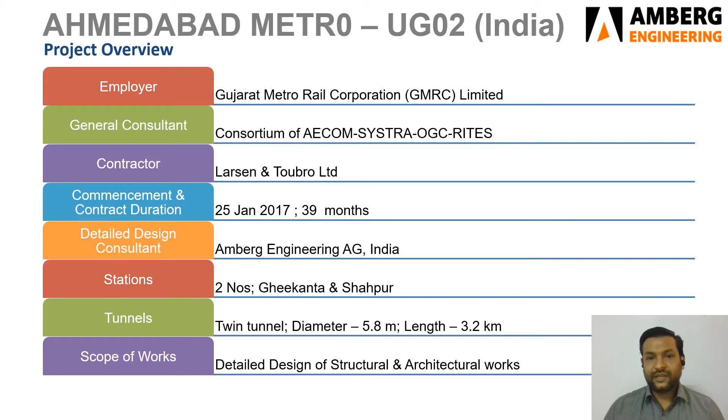The project is a part of phase 1 of metro construction in the city of Ahmedabad in the western state of Gujarat in India. The package UG2, comprising of 3.2 kilometers of twin bored tunnel and two underground stations at Shahpur and Ghee Kanta, with a small stretch of cut and cover and ramp connected to the elevated section.

As is visible, the alignment of the project traversed through the old city of Ahmedabad and posed challenges of ensuring the safety of some very old and dilapidated buildings coming in the alignment.

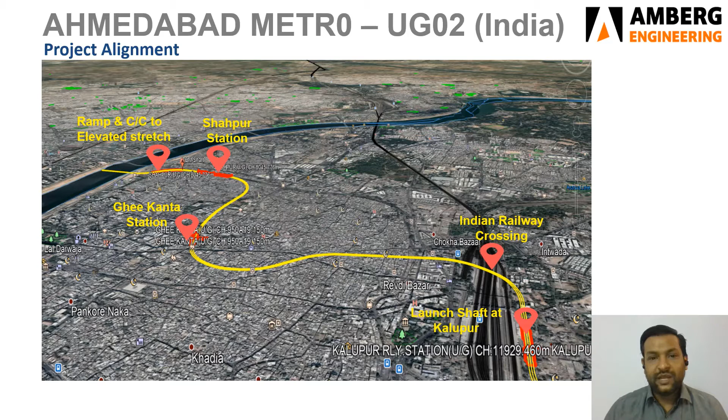The stretch starts from Kalupur launching shaft. Exiting from the shaft, the bored tunnel passes underneath a railway line, traversing a 2-kilometer section, opening into a 170-meter long Ghee Kanta station. The second section of the bored tunnel is of 1.2 kilometers, starting from Ghee Kanta station and terminating into the station box of 270 meters long Shahpur station.

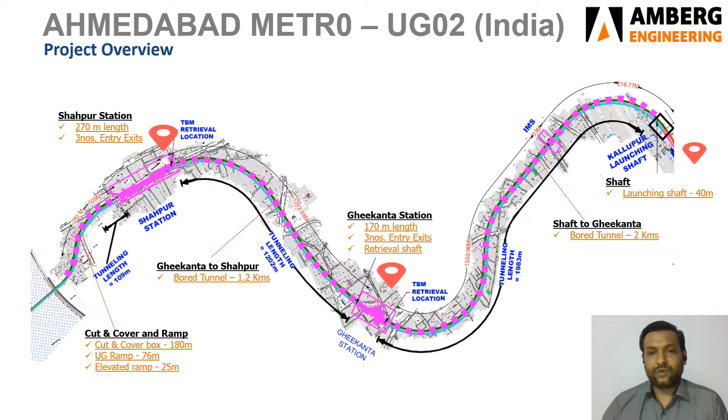The last stretch of this alignment starts from the end of Shahpur station in the form of a 180-meter cut and cover section, followed by 76 meters of underground ramp and 25 meters of elevated ramp, finally merging with the elevated section of the line, which is the contract boundary. Both the stations were planned for top-down construction using diaphragm walls as retention structures.

The underground metro line in the project is aligned in the east-west direction and is located on the eastern bank of Sabarmati River on a vast tract occupied by quaternary sediments. In this region, the major area falls into moderately deep soils ranging from coarse sandy to alluvial sandy loam and sandy clay loam.

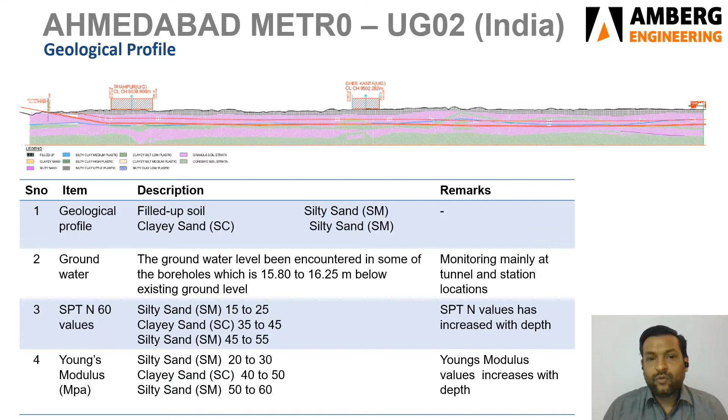Ghee Kanta station has been constructed adopting top-down construction methodology by installing the diaphragm walls from the top and then sequentially excavating and casting level-wise slabs. The station has three levels, namely the roof, concourse, and base, with an island platform in the center. Due to the limited ground space availability at this station, the station length has been limited to 170 meters. The functional rooms have been accommodated on the flared sides of the station.

One end of the Ghee Kanta station has been used to receive the TBMs launched from Kalupur launch shaft, and the other end of the station box is used to launch the TBMs for constructing the bored tunnels towards Shahpur station. This is a non-typical underground station with a large area in the center of station, posing challenges in the structural design in integrating all areas and considering the construction sequence with high-rise buildings with basements in very near vicinity. Proper instrumentation and monitoring schemes were provided based on settlement analysis and building damage assessment data.

The other station, Shahpur, is about 270 meters long. All the UG structures are being designed taking into consideration 120 years of service life.

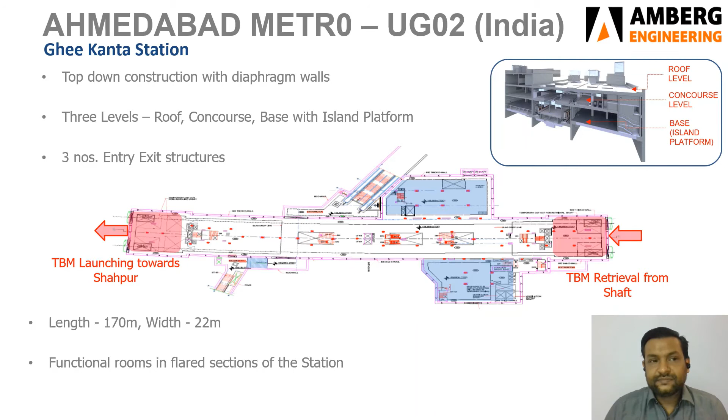The other station, Shahpur, is about 270 meters long. The station has also been constructed adopting top-down construction methodology in the same manner as Ghee Kanta.

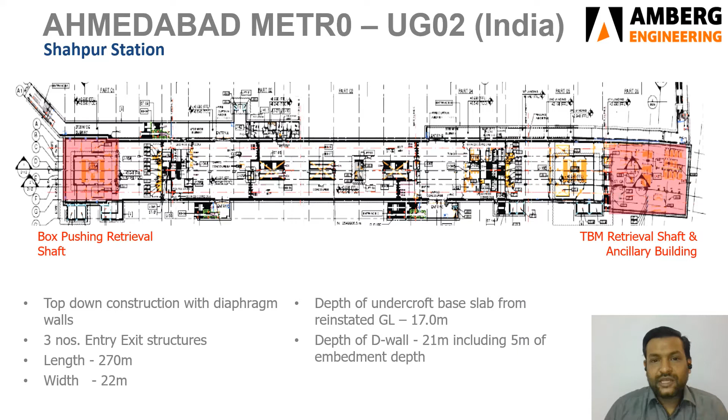Now I'll talk about the challenges posed and the mitigation measures proposed. Ghee Kanta station lies in a very congested area, limiting the on-ground footprint. The same had to be mitigated by having reduced length of the station and adjusting the functional rooms on the two sides. Top-down construction method was adopted to cast the roof immediately after the construction of D-wall so that some working space can be created at the top of the station.

Shahpur station lies under an operational road. The construction had to be mitigated through road diversion and taking up the top slab construction of the station in two phases with a longitudinal construction joint. There was a sewer line infringing with one side D-walls along the length of the station, and that had to be first diverted by microtunneling and then removing the existing utility by excavating and then backfilling for doing the diaphragm walls.

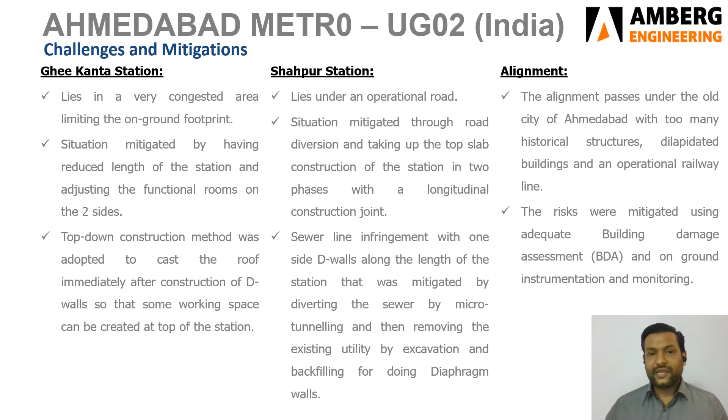The alignment passes under the old city of Ahmedabad, where there are too many historical structures, old and dilapidated buildings, and an operational railway line. The risks were mitigated using adequate building damage assessment and on-ground instrumentation and monitoring.

The scope of the works demanded architectural design using BIM platform. Amberg was BIM compliant right from the first submission, and all the architectural drawings were extracted from Revit models. In the following slides, you will be able to see the model views of both the stations.

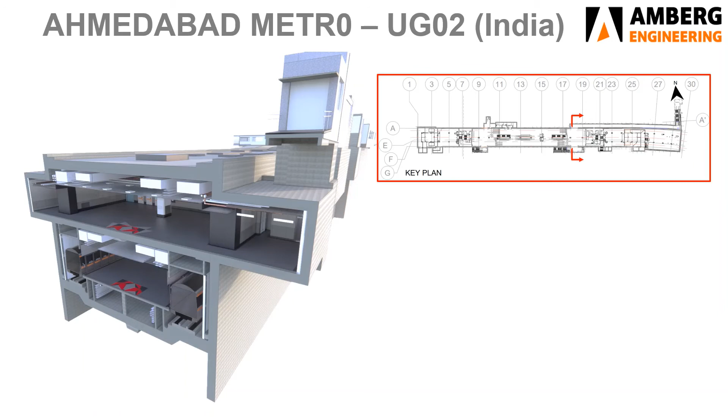All the finishes were also modeled in BIM. In the next slides, you will see the architectural finishes for both Gheekanta and Shahpur station.

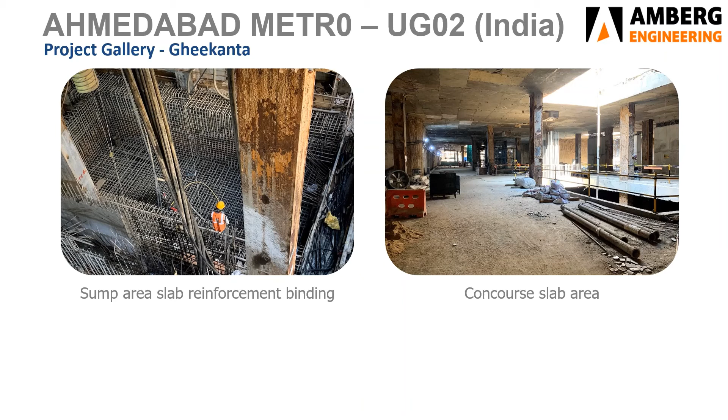Now I leave you with a few pictures of the project in the construction phase. With this project, Amberg launched itself as a full-scale service provider for the detailed design of metro projects for the structural as well as architectural works. It has been an exciting journey working on this project. We now look forward to use this experience to deliver more value-added services to our clients.